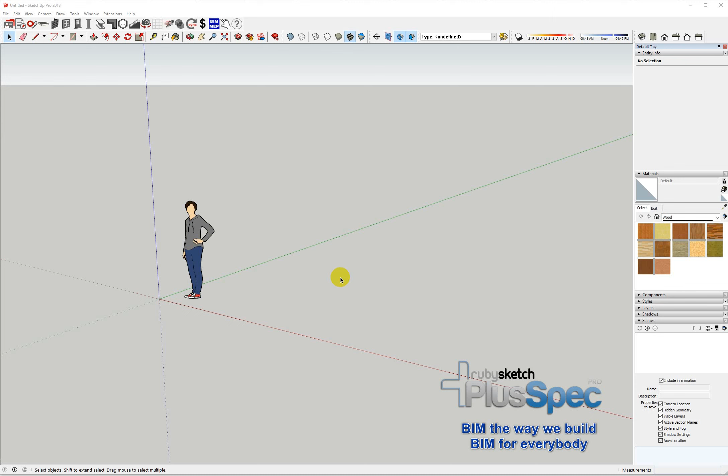This one's for the carpenters and the builders. Some people like to line their joists and their studs up in one go. Now what I'm going to do is just quickly draw a rectangle. There's no particular size here, and I'm going to show you what the question I've been asked is.

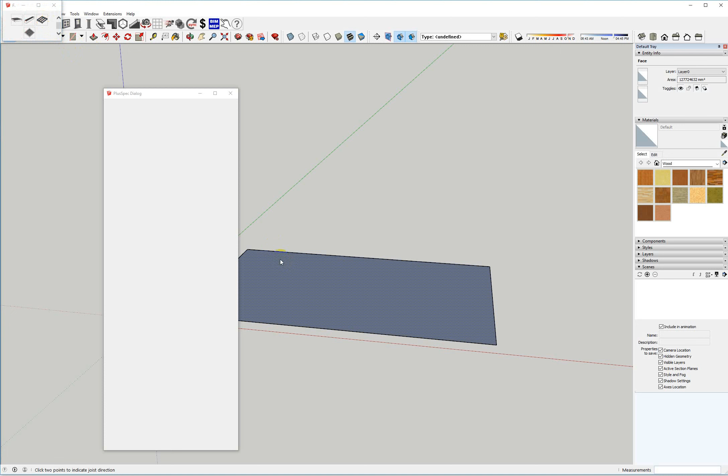I'm going to put some joists in here, and I'm going to make these joists at a spacing, so 450, which is 16 on center, or 600 could be 24 on center, wouldn't matter. I'm going to make it 600 centers, okay, and go submit. Now I'm just going to give my joist a direction, and you'll notice there that I have my joist at a spacing.

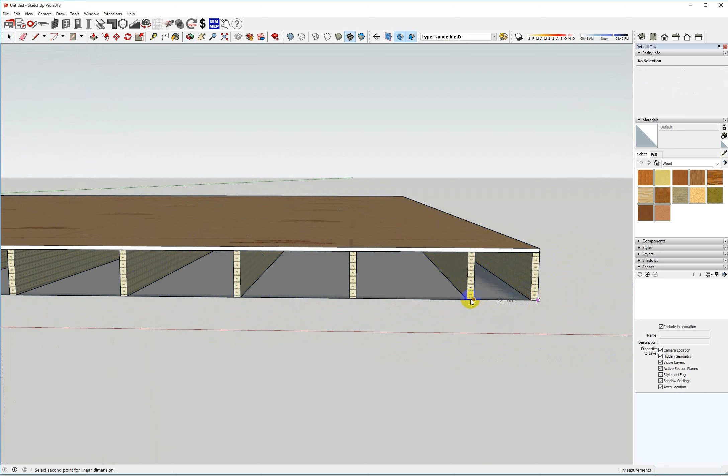However, you'll notice over here that I have a discrepancy. The spacing is less because the maximum span of the joist to suit sheet sizes, which is the size of the sheet that goes on it, works so that they work in a pattern and saves you cutting a sheet. And you probably realise that if you've ever put down a sheet flooring. So PlusSpec has to decide which end to draw its joist at 600 centres from, or 24 on centre.

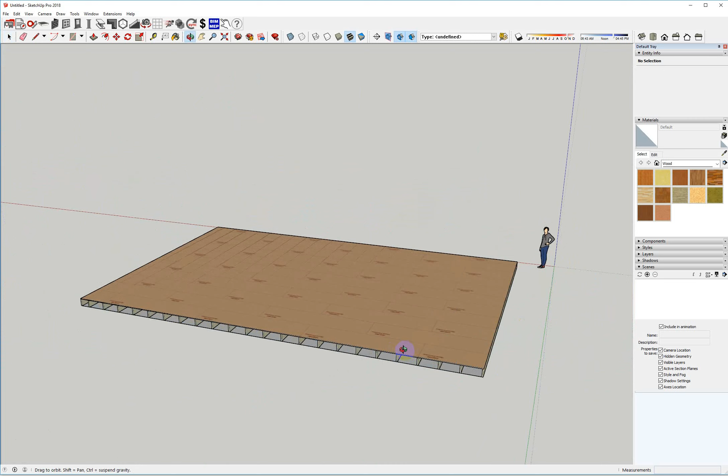However, when I go and do my walls, if I start my wall here, obviously I'm going to try and line my studs up to 600 centres. Here we go, timber and lumber sizes, 600 centres, and go submit. Now it could be 35 or 45, doesn't matter, whatever timber size you want to use.

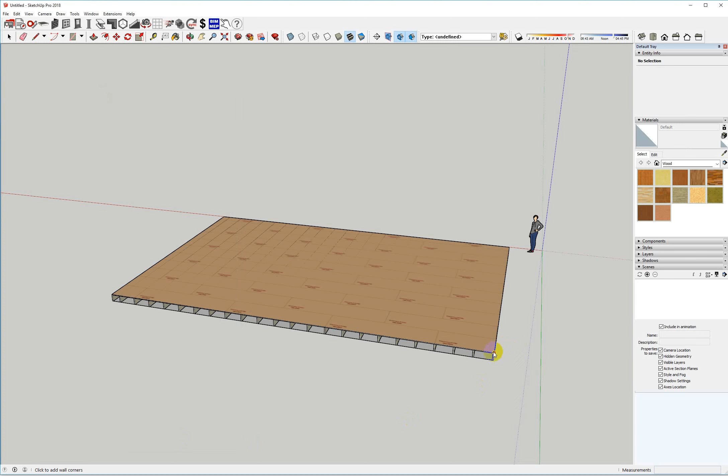Right, go submit. I'm going to quickly just draw in a loop the way that most people would probably draw walls, because it's faster. However, when you're building it, you actually do it a little bit different, and I'll explain that in a second. Okay, so I've got that. I'm going to quickly just create some scenes so I can see my framework and we can explain how to line the joists up in two different ways. So submit. And up the top here, I should come across with structure. Yep, okay.

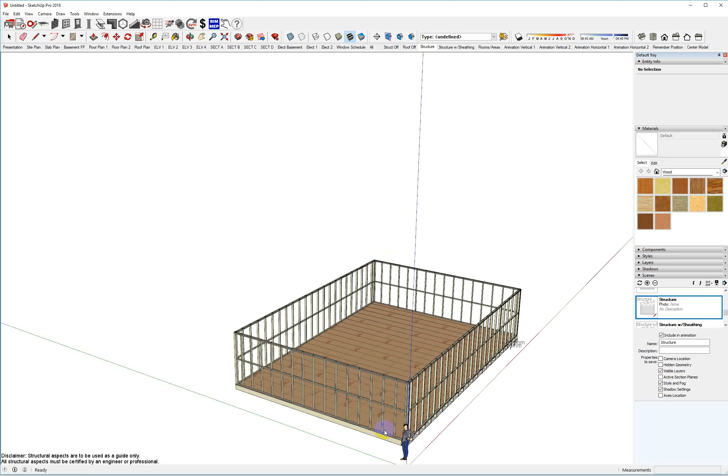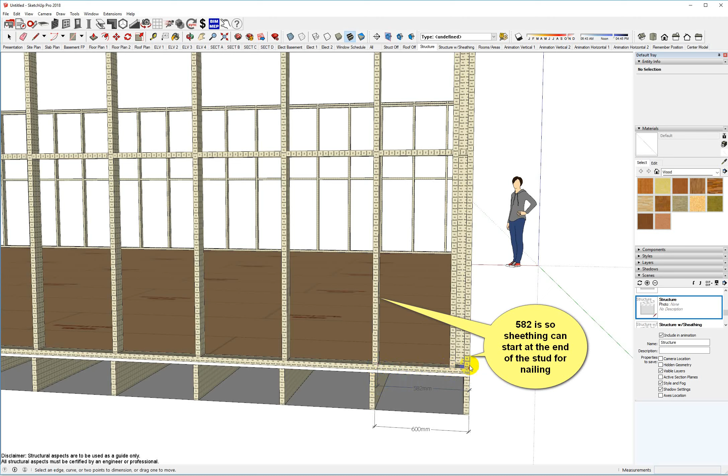Right, on that side of the joist there, I don't have a line up. However, on this side, I do have my wall frames lining up with my studs. My joist lining up with my studs. So I've got a 600 centre to start, and here I have 582. Half the thickness of the stud is the reason why it's done that.

Okay. Now we all know that we don't miter joints. However, it's actually not a bad way to build because you can tell which is the inside and the outside of the frame. So you know what, I wouldn't discount that. Lining up frames is a good way to do it. But realistically, if I just move these joists over to here, how do we actually build this? Let's have a look.

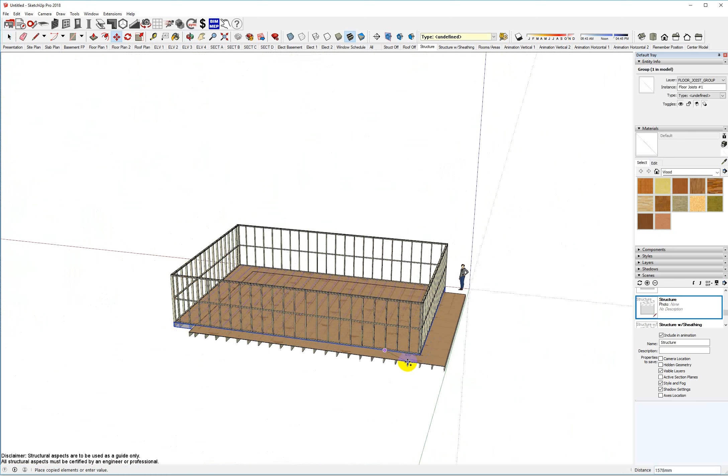We actually start our walls like this. And if you're ever going to do a frame layout so that your carpenters on site can actually build with square ends, this is how I would do it. Okay, submit. The maximum length of timber you can buy, 24 foot or whatever it is, the maximum length in Australia is 6 metres. So I'm going to write in my first measurement of 6 metres. That's 6, 1, 2, 3, enter.

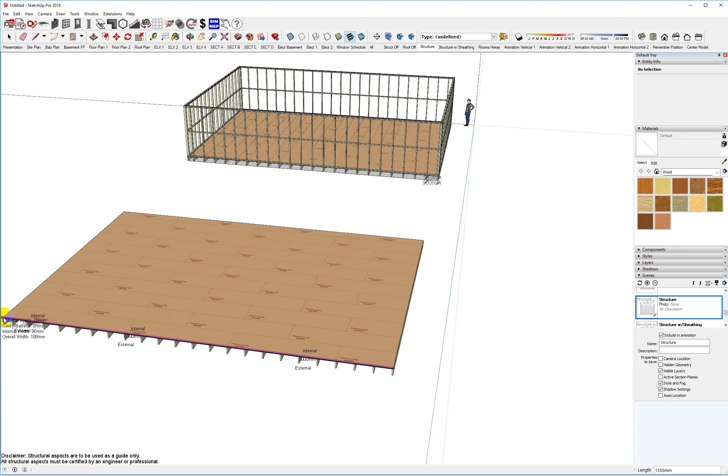Okay? And then I would go, well, am I over 6 metres? And I am, so I'm going to go 6, 1, 2, 3, enter. And when I get to the end of my wall, I'm actually going to double click. The reason being is that we cut all of our frames square. And the same thing here. I'm not sure how long this is. It's longer, so I'm going to go 6. And you can make it 4.8 or whatever you want. Double click, and I'm actually drawing the frames the way I would build them.

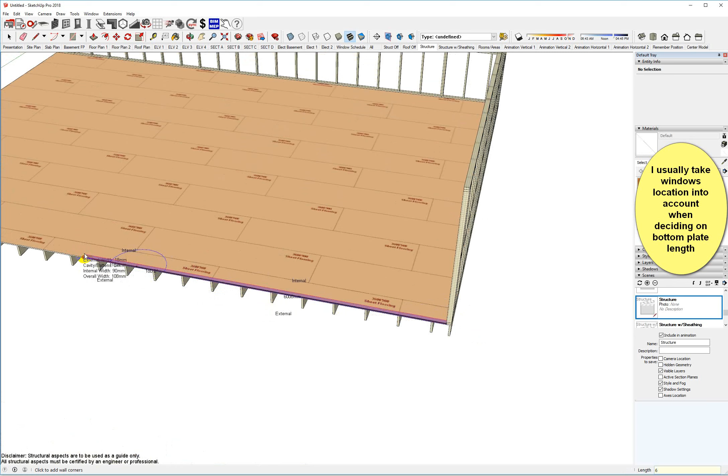Same again. Now I might go back and do this one again in a second. Double click, and here I think you get the picture on this, so let's not waste your time. All busy people, I'm sure.

Okay, but I wanted my frames to line up with my joists. So really what should have happened is the 600 centre should have worked back this way. Knowing that I only need 3 frames, it doesn't really matter whether they're 6 metres as long as they're a length according to my joists. So I'm actually going to delete these walls here because they're on the opposite side. PlusSpec is starting my centre from the way I draw. And I hope that explains why it does that.

I'm going to go in and draw my wall. I've set up a shortcut W for walls.

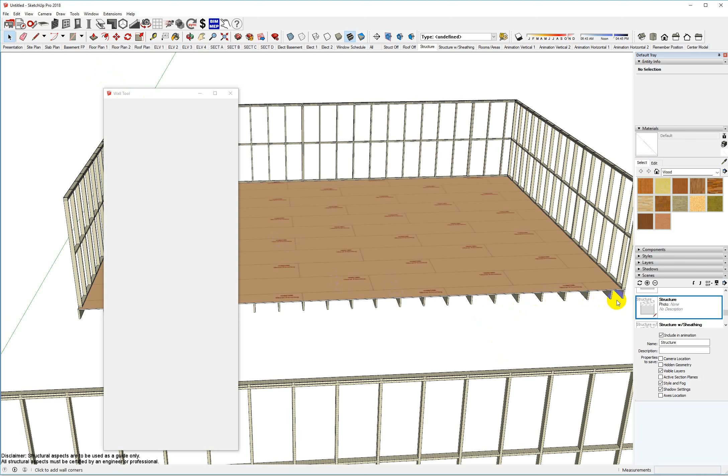Okay, submit. I'm going to draw my first wall to here, right? And now I'm going to go 6 meters. And then I'm going to go to the end of my wall. Oops, I actually clicked. If you ever make a mistake like that, just push delete and it will go back.

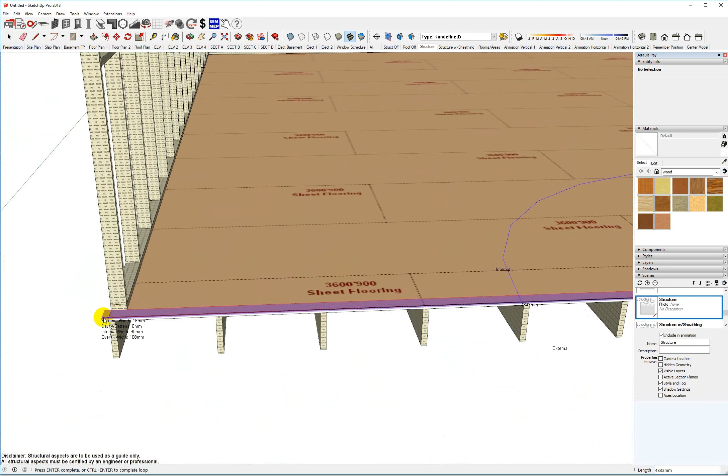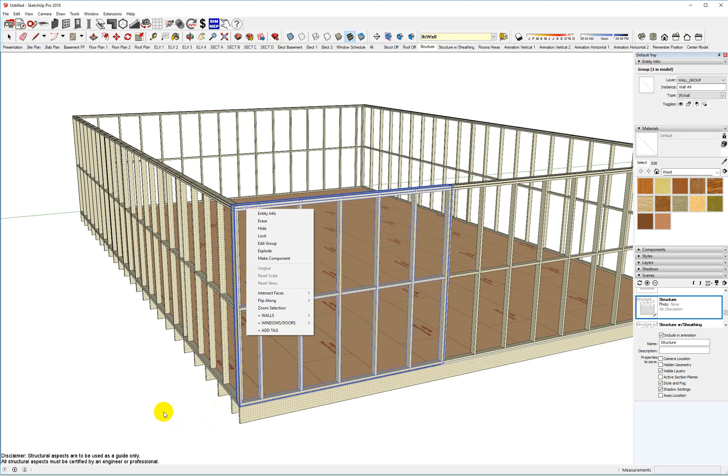Okay. And now you see that all of my frames line up with my joists. All I did was basically made my shorter wall start from that end. Some countries, for instance America, actually use this type of stud like this, and they might put trimmers in between, and I'm not sure if this version's got it. Walls, no, but the next version of PlusSpec will have it. You can add timber to walls and you can create whatever type of corner that you want to do. So I hope that helps out.

Now, one thing that really messes up these spacings here is windows. So you might not be able to go 6 meters, 6 meters. You might have to make it suit whatever, because when I put a window in, you'll notice some changes here, guys, too, because this is the next version of PlusSpec that's coming out. Standard size windows is probably something that a lot of people haven't seen, and you're probably the first to see it.

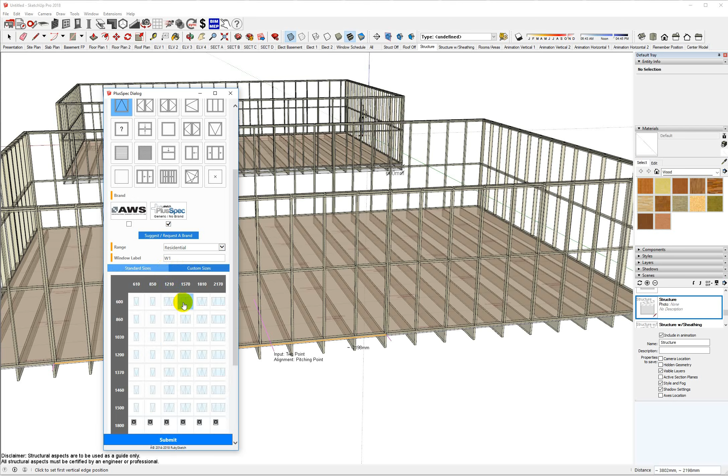Standard size windows usually work to brickwork. Okay, you don't have to use standard size windows. You can go back to custom size windows, and away you go. But I'm going to go to a standard size window here, and I'm going to go and put my window in. Where is it? Now, an architect doesn't care how your studs and framing works. He just cares how it works with the sun or something.

As soon as I did that, I've now thrown out my spacing again, because PlusSpec works out the cheapest way to build that wall, which is basically 600 centers, 600 centers. Oh, hold on. Let's start 600 again, because that's the least amount of timber that goes into the wall. You might not like the way that that works, and look, we're open to comments, guys, and we can add different functionalities to make that work differently.

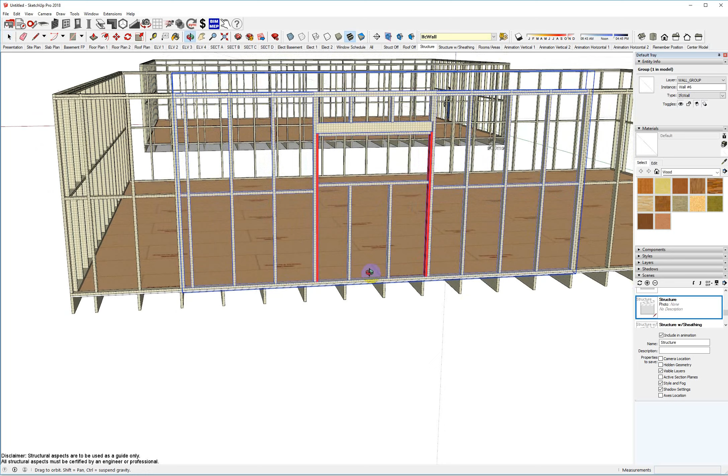But there's a good and bad reason for this. Number one, it costs less in lumber. However, when you're doing your sheathing on the outside, your sheathing is going to have to be cut to suit the stud spacing. So, look, happy to take advice on that one. I hope it explains why your studs work out one way and not the other. It's basically because you're drawing clockwise.

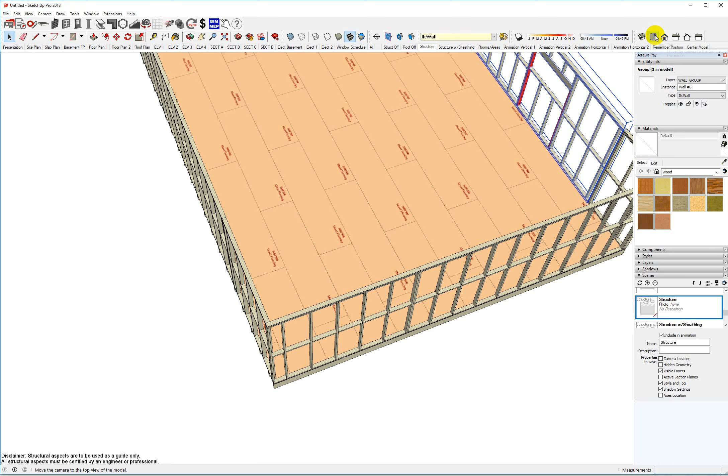However, if you're actually creating a real frame, I'm just going to go top down here. So say I was going to make this into a frame layout: view, camera, parallel projection. I can now see where all the joins are in my frames. If I label my frames, they'll have numbers on them, right? And if I wanted to do this into a frame layout for a prefabricated manufacturer, my walls are numbered according to the way they are. But even if you're building them on site, it's nice to be able to say, well, wall 9 is this.

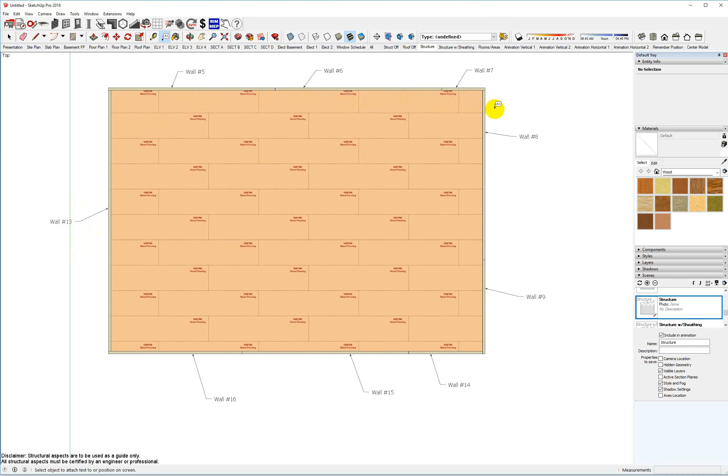And probably another helpful tip that I use a lot, and I'll show you this in a second, is how to get those individual spit outs for every individual wall. Okay, so I can go and dimension from here. I use the shortcut D for dimensioning, which you can set up in Window preferences, shortcuts. Okay, and this wall actually starts from here, right?

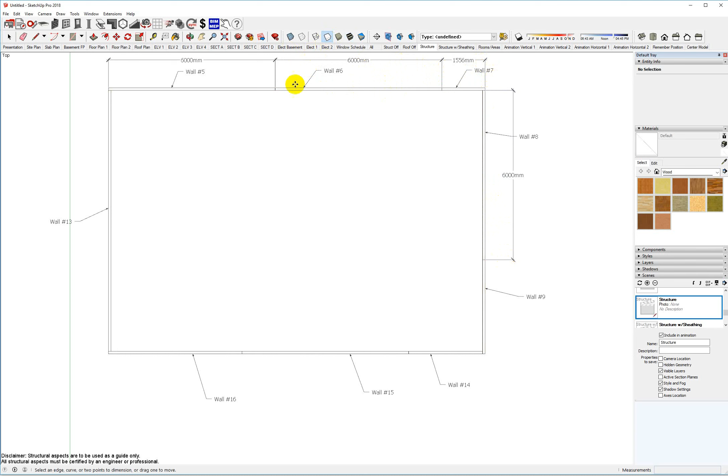If you go into, say, a black and white view, it probably makes it a little bit clearer. You can color by layer, you can do a whole heap of different things to highlight these frames. You can run a section cut, whatever you want to do, it doesn't matter. And now I can see, well, I'm going to cut bottom plate, top plate 6 meters, bottom plate, top plate 6 meters, and I got 1556.

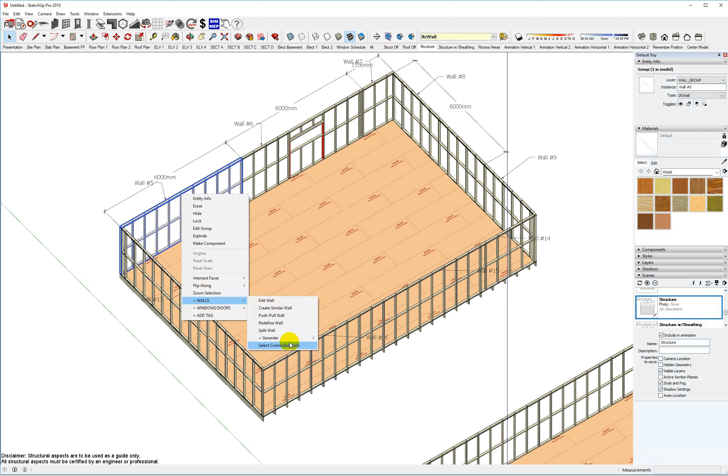If I wanted to actually get these individual walls into a separate template, so I might say, I want to just print wall 5 by itself, what you can do is you can right-click the walls, you can select the connected walls. Okay, it's only connected what I did there. I'm just pushing Shift and I'm selecting them manually.

This one here, I'm just going to deselect this one here. I'm going to hide these walls, hide, and I'm going to hide my floor as well, because all I want in my takeoff is just this wall and the timber inside, or the lumber inside of it. If I do a takeoff, bang, all I have is my framing, the lumber that's associated just with that piece of framing.

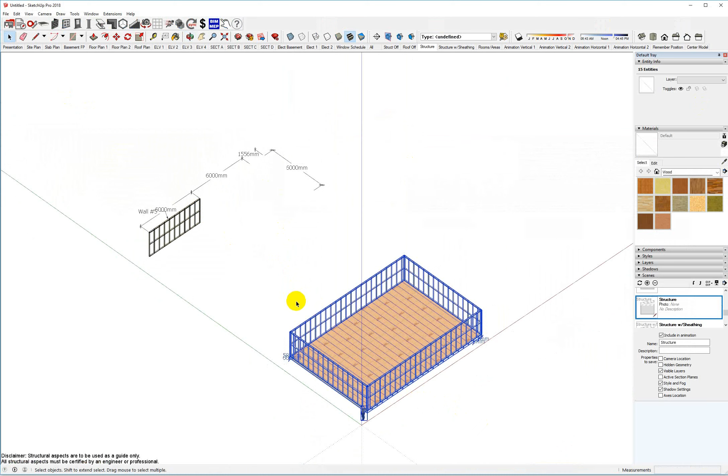Now I am using a beta version here, guys. It actually picked up this here. I should have actually got rid of this, hide, because you'll notice when I do my takeoff now, it'll only give me just the framing inside of that wall, and I can call it wall 5. I can call it whatever I want, wall 5, and then just go export Excel and then copy and paste into Excel, or whatever I want to do.

It's a good way to just say, okay, well, you can get an apprentice, say, go and cut all of these lengths. This is the size lumber you're going to cut. You're going to cut 3 at 6 metres, you're going to cut 11 at 2 metres 635, and 16 at 565, and 4 at 5 metres 400. It's a very, very quick and easy way to do it. So I'm not sure if you thought of that.

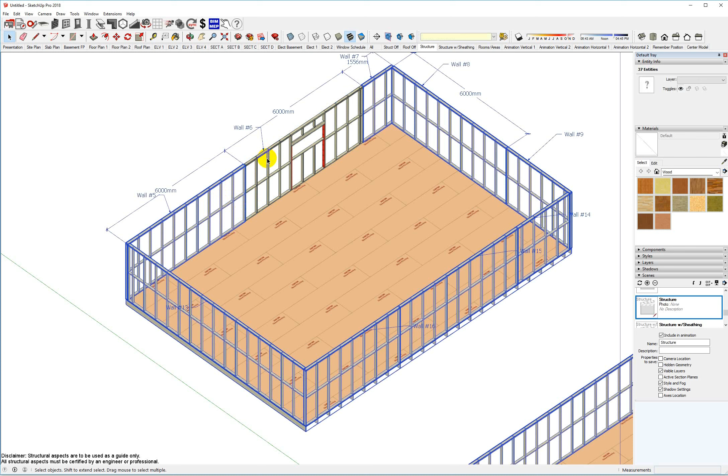I do it that way, and obviously I'm going to go Control Z, bring those walls back again, and all I do is I can actually go Control A, which selects all, and then I can just Shift and deselect that one there and go hide again. It's just a quicker way to do it. Okay, and now I've got the next wall. So if I do a takeoff of the next wall, I now have my wall 6.

Right, and there's everything that's involved in wall 6, including the header that you're going to use for the window. So it's a really good way to do a frame layout and setup. And you might say, well, I don't want to wreck the rest of my model, because there is a problem. I'm going to go Control Z again. Control Z. Oops, sorry, that was Shift Z. Control Z.

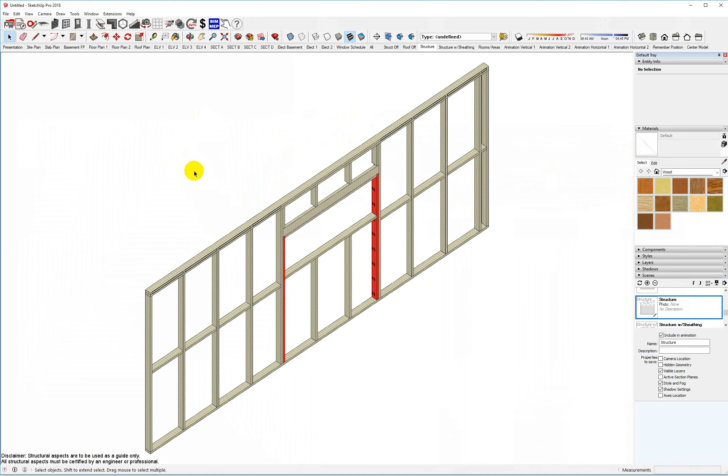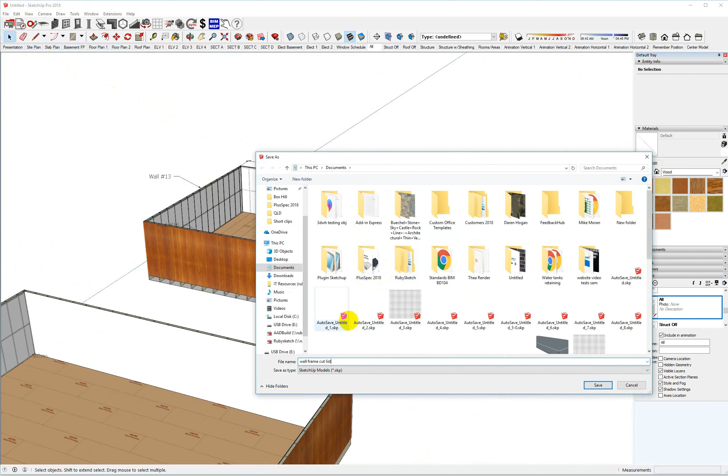Okay, here's the problem. I go to all, and you'll notice that it hasn't clad the end of the wall. So really all I'm doing is just a frame layout. So I'd usually just copy all of my frames into another one and say, okay, call this file, save as wall frame cut list, and save. Now I'm going to show you another little trick, because this is kind of handy. This can save you a lot of money on site.

I'm going to do it again. I'm going to go Control A. I'm going to deselect the next wall. Right. I'm going to hide the rest of the model. Hide. Okay. I can actually create a scene, so I can go here, right click, add, and in this scene I can call it wall 7. Okay, and now I've called that wall 7. Every time I want to go back, I can find that wall, provided I have hidden geometry ticked.

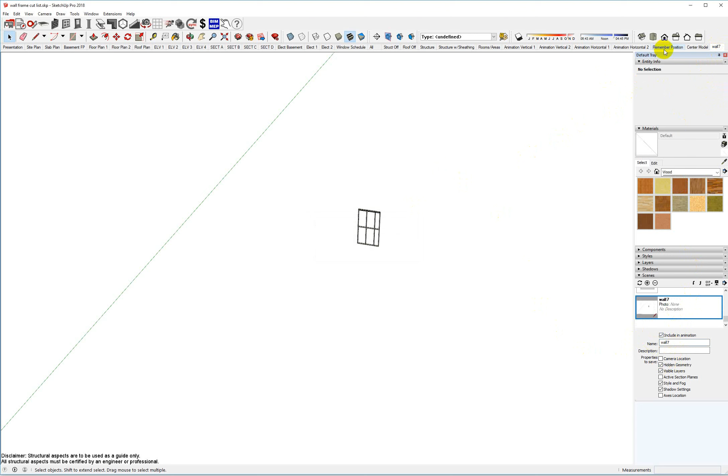Right click, update. Okay, and now I can go Control Z again, and here would be wall 8. Right, so I'm going to go Control A, select all, deselect wall 8, and then go hide. I've set up a keyboard shortcut as H. I can go right click, add, call it wall 8, and save it. Now I can actually quickly go through and print individual walls as I go, or take off individual walls as I go.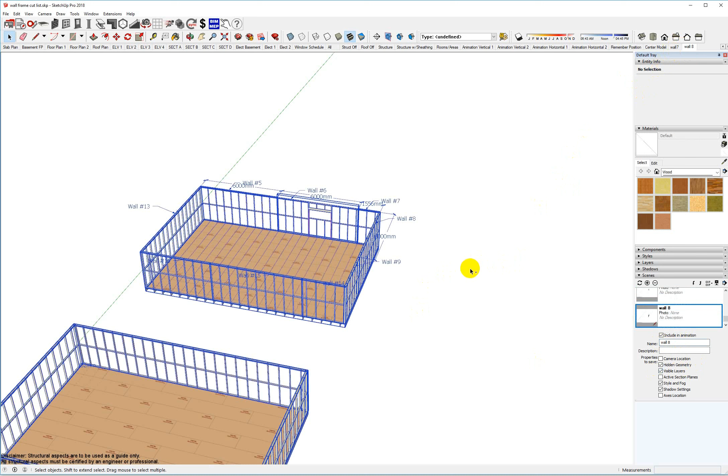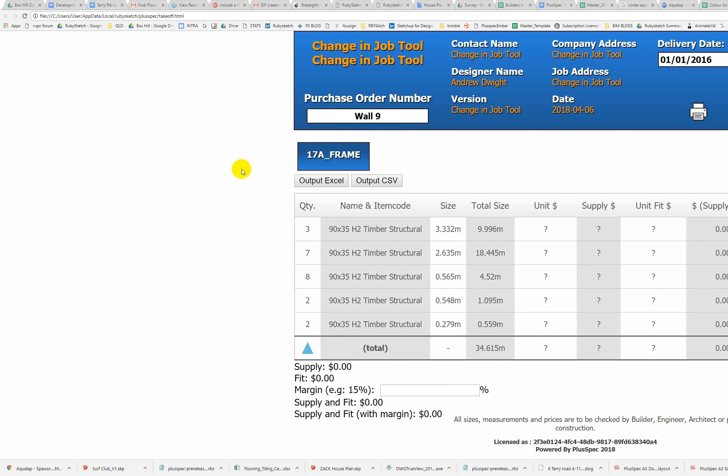Right, so Control A again, I'll just do wall 9. Right, right click, add, call it wall 9 so you don't forget. Right, and then obviously do a takeoff. So you'll see the difference here. If I do my takeoff now, this is wall 9, call it wall 9. And if you're lazy, which sometimes I am known to be, you can simply just go and screen capture this and just make as many screen captures as you want.

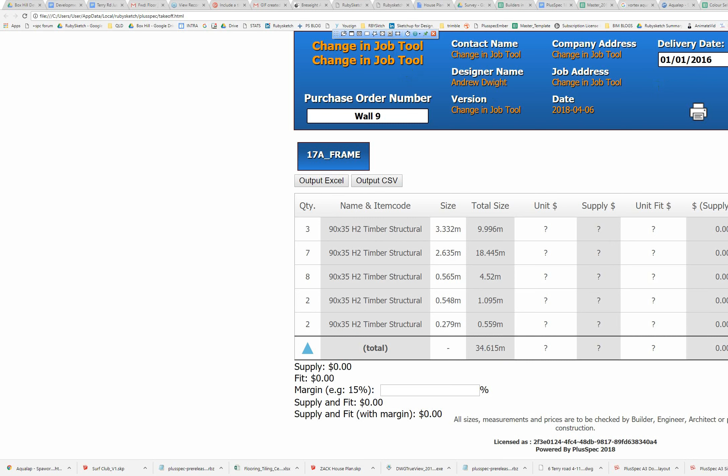I might have some screen capture program over here. Go plus, screen capture this one. This is all the information that I need. It's wall 9, and then I'll go plus again, and I'll go back to wall 8, which is the previous takeoff here. It's wall 6. Doesn't matter. You'll get the idea here. And I go plus again, and you can just go and print them all individually without having to go to Excel and without having to worry about messing around. Alright, get back to my model.